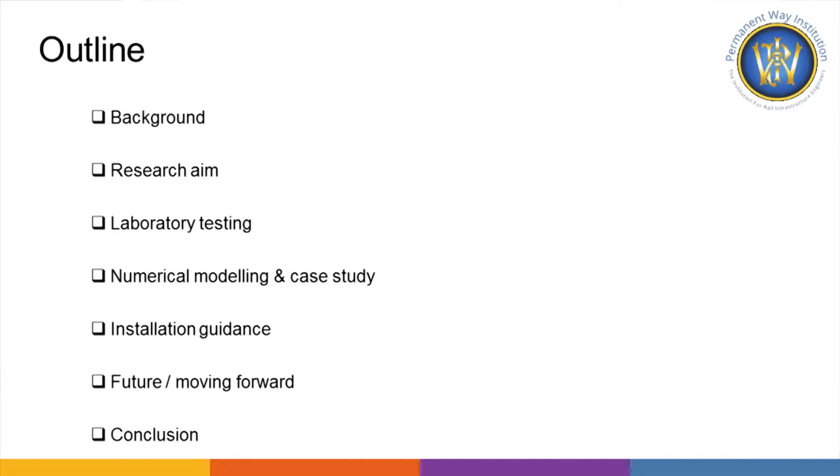Now, the outline of the presentation will go as following. We'll go through very briefly the background, the old stuff, the boring stuff. Then we'll talk about the aim of this research, and discuss and show some results obtained from laboratory testing and numerical modeling. That's basically all me, that's the boring, theoretical stuff. Then Mr. Noggi is going to come and steal the show with his impressive stuff about installation. So it's a mixture between theory and installation guidance.

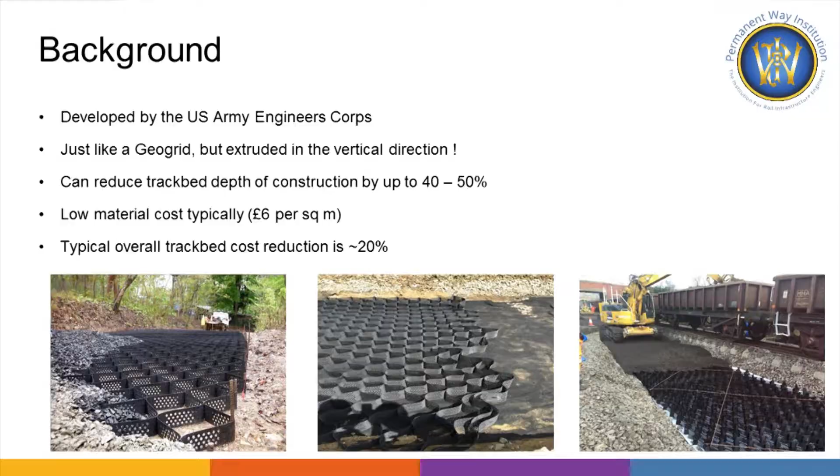Now, what is geocell? Geocells are basically honeycomb panels. They look like a geogrid, but they're extruded in the vertical direction. It's not a geogrid, but it looks similar. You fill materials inside, and it creates a reinforcing effect on the subgrade. It's been developed by the US Army to build roads for jet fighters and tanks, so it's quite robust, and it can reduce the depth of construction by almost 40 to 50%, and it's very cheap. It costs about £6 per meter square, and if applied properly, it can lead to reducing the cost of trackbed installation by about 20%. But that's basically applying it carefully.

Now, how does the geocell work? The geocell works in three mechanisms. It creates a vertical confinement due to the friction of the geocell, the internal friction of the geocell wall. It also creates a lateral confinement by developing something called hoop stresses - you apply the vertical pressures, and then you get hoop stresses that confine the material, not allowing it to move or deform laterally. And if you've got excessive loads, you can end up with a tension membrane effect, getting some tensile strength out of that. So this is how it generally works.

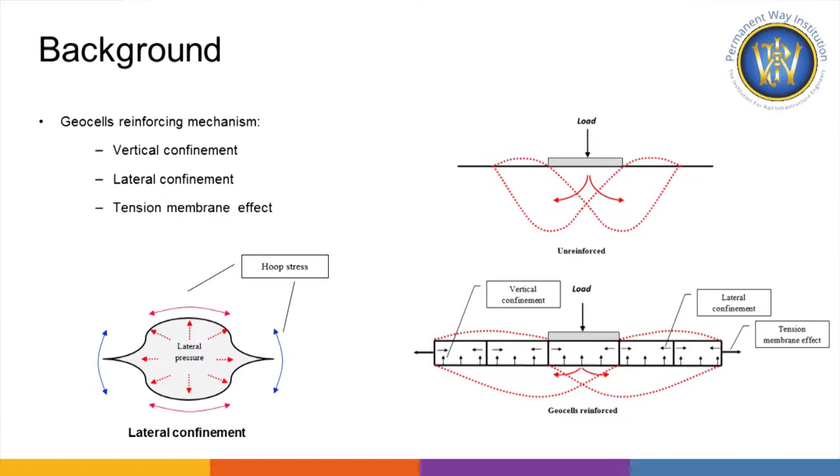Now, it all sounds good. There's tons of research that proves it works, but there's a problem: designers and contractors are reluctant to use it. Designers are reluctant to design for it because there's no universal way of designing trackbed with geocells. That's a struggle - I'm a designer myself, and it's not an easy task. There are many ways, but no universally agreed way. There's also limited experience with installing geocells. We have seen sites since probably the early 90s, maybe 80s, that had geocells, but it's still limited - it's mostly done for bespoke sites.

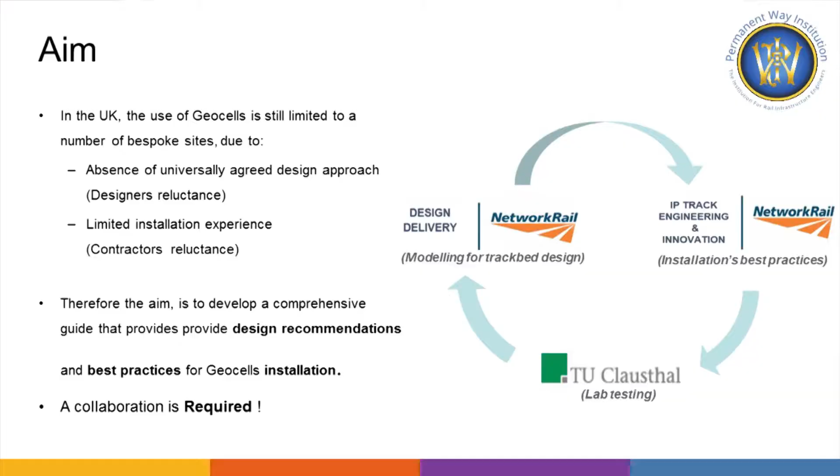So what's the aim of this research we started? The aim was to come up with a comprehensive guide that provides designers with design guidance and best practices for contractors to carry out the installation in the most efficient way. But how can we do that? Well, in the TBI we're mostly a design team, so we had to have some sort of collaboration. We worked with IP Engineering and Innovation and TU Clausthal University in Germany, which is a leading university in geocell research, on trying to understand how we can design and install geocells in the best way possible.

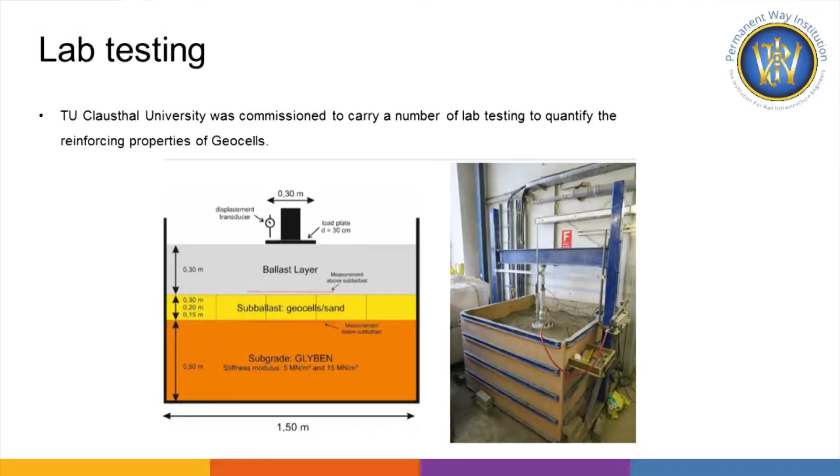To go through the lab testing, TU Clausthal University proposed a test configuration where we relied on applying a plate load test for a trackbed with different geocell thicknesses, reinforced and unreinforced, instrumented with a number of pressure sensors, settlement sensors, and so on. We've been doing the tests for a number of different soil stiffnesses. The tests are currently ongoing - so we're still getting the results. There's so much data coming through now, and we're still in the process of analyzing it.

But I'm just going to go briefly through some of the most interesting stuff we've managed to understand so far. As I said, they've instrumented the rig with different pressure sensors. So what we've done, for example, is apply a plate load test on different tracks with different sub-ballast or fill material thicknesses, reinforced and unreinforced - we've got 150, 200 mil, and 300 mil. And this is the amount of stress being felt by the subgrade.

So you can see how much stress is being exerted. This is the most important thing for us, because if you know the stress, you can know how much the subgrade is going to settle, and what sort of failures you may experience, as Matt explained in his previous presentation. So it's very important to understand that.

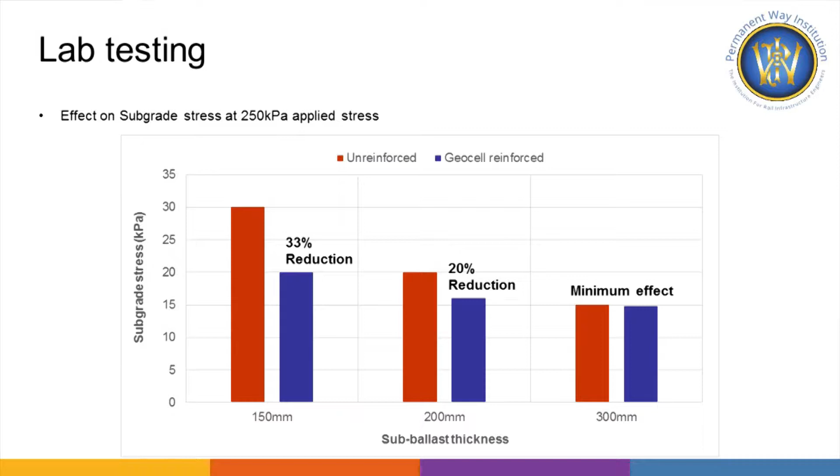From the geocells, for example, for the reinforced or unreinforced case for the 150, we're getting about 30 kilopascal if we apply 250 kPa on the surface. If you put a geocell, you reduce that by 33%. But if you go for a 200 mil geocell, you reduce that by 20%, and if you go for 300 mil, the impact is very minimum. That's confusing - people think if I have a thicker geocell, it should work better. Well, yes, true, but geocells only work if you get lots of stress being applied. Because so much stress is dissipated by the time it reaches the subgrade, the impact is very small. If we had higher stresses being applied, it would basically get the geocell to kick in for these particular cases.

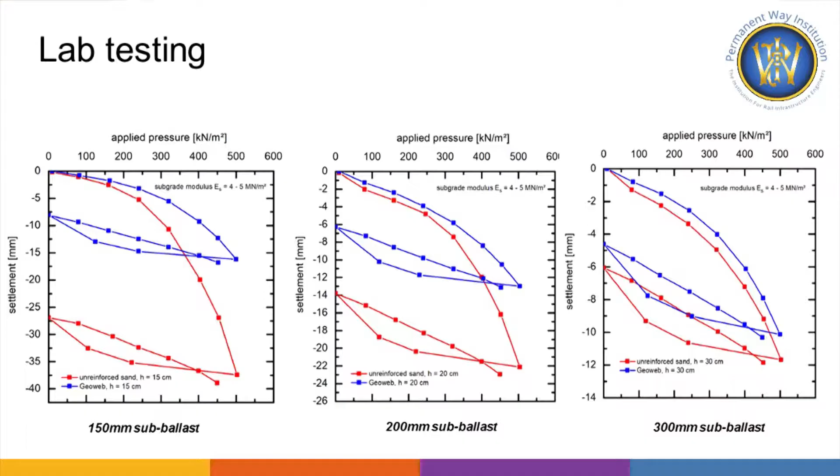So this is all nice - what can we do about it? We're trying to extract as much information as engineering parameters from these tests, because there are different ways of interpolating these results. We took the information from some of these tests and plugged it into our finite element model. It's not as fancy as what David showed you earlier this morning with his modeling stuff, but it should do the trick for us.

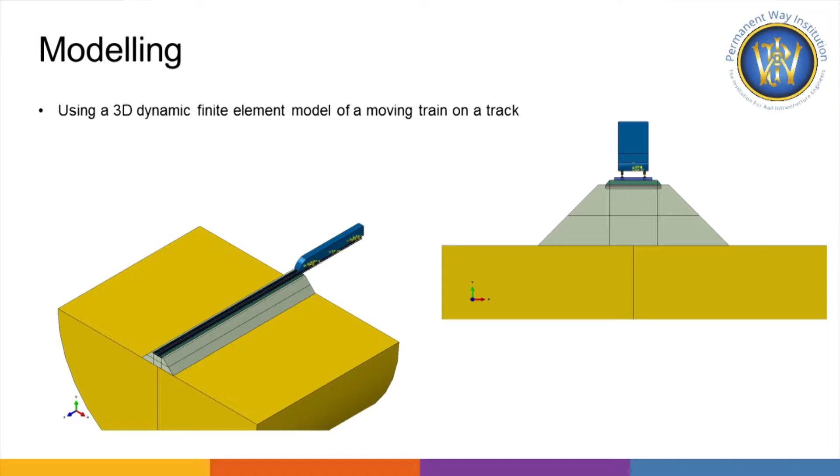So we've used a 3-dimensional finite element dynamic model - it's a moving train. We've got a Virgin Pendolino train moving on this embankment, with a total depth of almost 50 meters. It's quite thick in terms of the analysis, and it's running at approximately 100 miles an hour.

We looked at 3 design scenarios. We're looking at standard design right from our design standards - if we've got this kind of soil, we're going to have this sort of design. And we're looking at 2 alternative geocells with reduced thicknesses. The soil we wanted to look at here is about 20 MPa, somewhere between firm and soft clay. We're looking at a line speed of 100 miles an hour and quite high traffic, 30 EMGTP, and we've carried the analysis for 10 years.

The purpose of this analysis is to put the parameters from the test into the model, try different designs, and look at the total track settlement, because that will basically drive your maintenance, tamping, and interventions. Obviously, for the purpose of this exercise, we assumed no tamping or maintenance is taking place for 10 years, so we just want to look at the raw total track settlement and see what we get out of it.

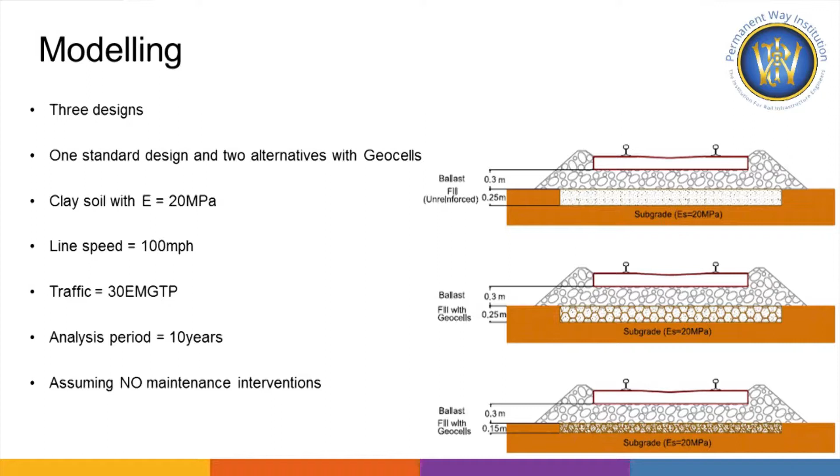For those 3 cases, we looked at the standard design by Network Rail standards, which is 300 mil ballast with 250 mil fill material. We proposed an alternative with the same thickness but with the reinforced case, and with a reduced depth of 150 mil fill. So we considered 3 cases, and wanted to look at the total amount of settlement across the subgrade for the model. The model has a length of 59 meters, and it has something a bit unique you wouldn't find in a lot of models - it has inherent track geometry, so we wanted to generate dynamic loading.

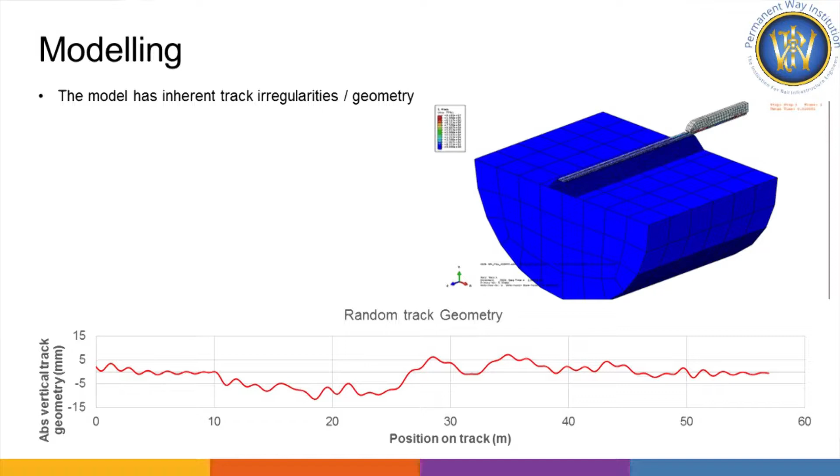If you run this model with a smooth surface, probably rail surface, you're not going to get any significant fluctuations in dynamic modeling. So what we've done is basically create some sort of inherent geometry on the surface of the rail to generate these dynamic loads, to be as realistic as we can with the modeling.

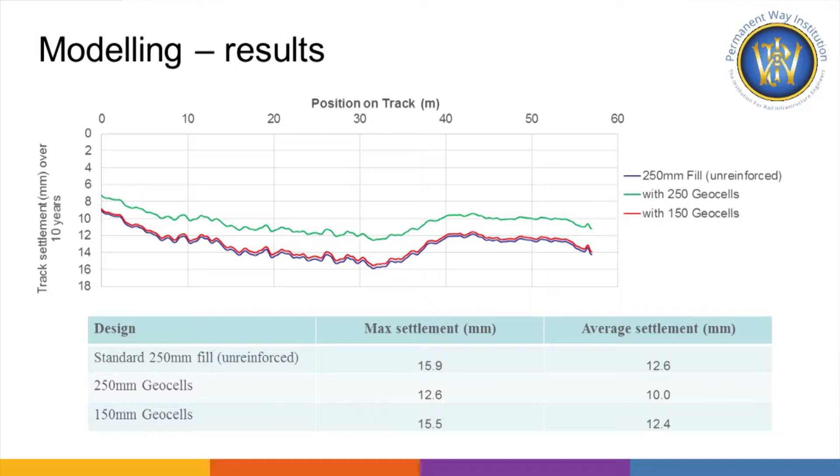You can see that the one with the geocell seems to be settling at a rate about 20% less than the unreinforced case from the settlement point of view. But if you reduce the geocell thickness to 150, you end up with a very close answer to the unreinforced case with 250 mil thickness. So that tells me if I replace my standard design with a reduced design by 40%, I'll probably end up with the same performance for that case. Things can be different for different ground conditions, stiffnesses and so on, so that cannot be applied everywhere, but for the sake of this exercise, this seems to be the case.

Now, to validate this, or to see if this is what we're getting in practice - a year or two ago, we worked with David Woods on the Northern program, where we installed, or designed, geocells with reduced thicknesses. For that particular track, the standard design had 230 granular fill and then 50 mil of sand. What we did with the geocell, we reduced the 230 to 150 mil with the geocells, and then we installed it.

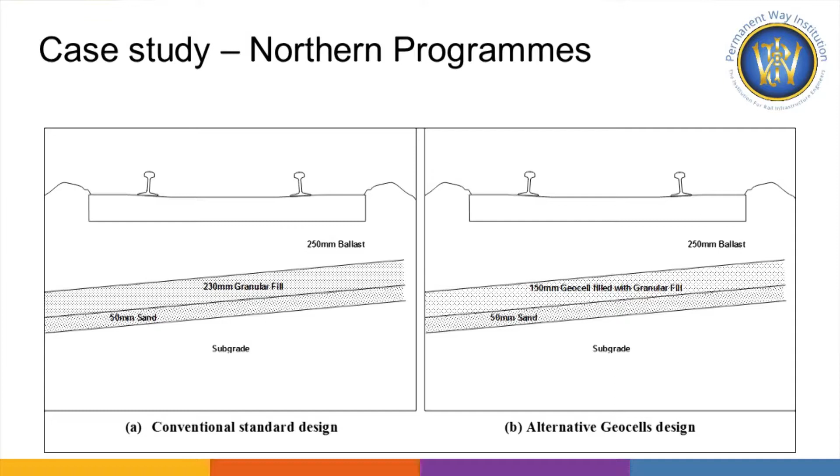You can see there's a significant change in the rate of deterioration in track quality just by installing the geocell, even though it has a reduced required thickness, but it seems to be performing in a very stable manner. If you look at the rate of degradation of track geometry, at the top 35, it used to be degrading at 0.15 mil a year. Now it's almost not deteriorating at all.

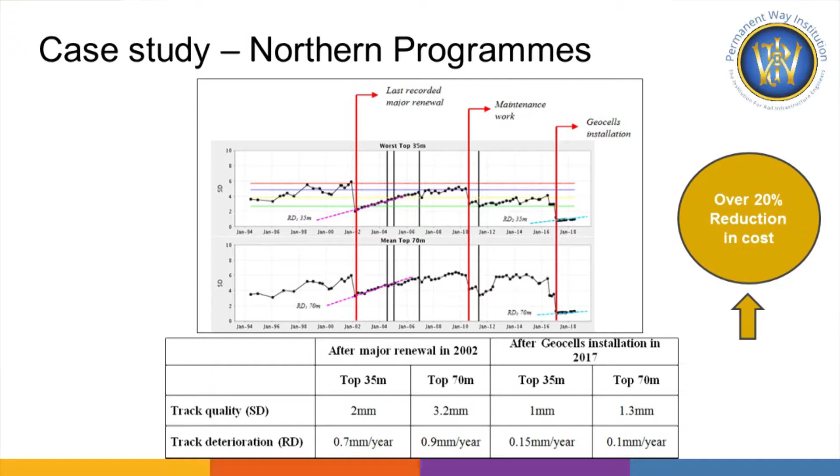Sorry, it was deteriorating at 0.7 and then reduced to 0.15 mil a year. On the top, we're seeing something similar - it used to be deteriorating at 0.9 and now it's deteriorating at 0.1 mil a year. So there's a massive improvement in terms of performance after the installation of geocells.

Now, what's the beauty of this? Well, it was 20% cheaper than going for the full dig. So we managed to reduce the dig depth and have very good performance. I think the estimated saving was about £300 per linear meter of track installation. So it seems to be quite impressive.

Now, I'm going to hand over to my colleague, Levente, who's going to go through all the practical aspects of installing geocells properly. Thank you.

And the middle is the pointer. Yes, okay. If there's something that's not up for debate from Mohammed's presentation, it's the fact that I'm Levente Nagy and I'm a senior design engineer at Network Rail.

We started installing geocells on isolated sites since the 80s, but because that was just a small number of sites throughout a few decades, the installation contractors didn't get to learn too much from their mistakes because they never had the chance to repeat such an installation. But nowadays, because we understand better the benefits of geocells, we are installing and specifying more of these products at our sites. And obviously, like any novel product or new installation process, that comes with inherent mistakes that we're trying to learn from. So we are continuously gathering feedback from our installation contractors, and we're working on putting together guidance that will be useful for the whole rail industry in the future.

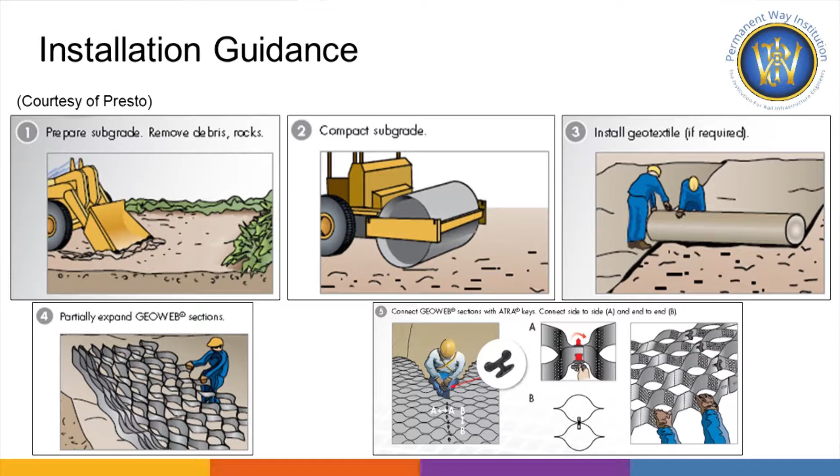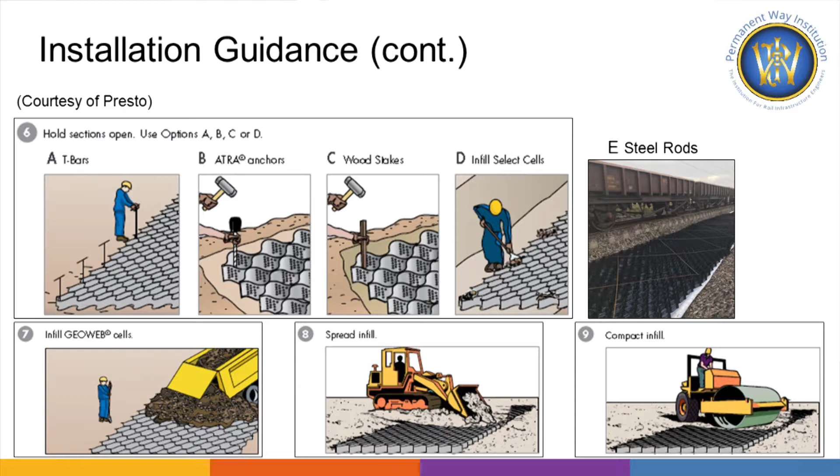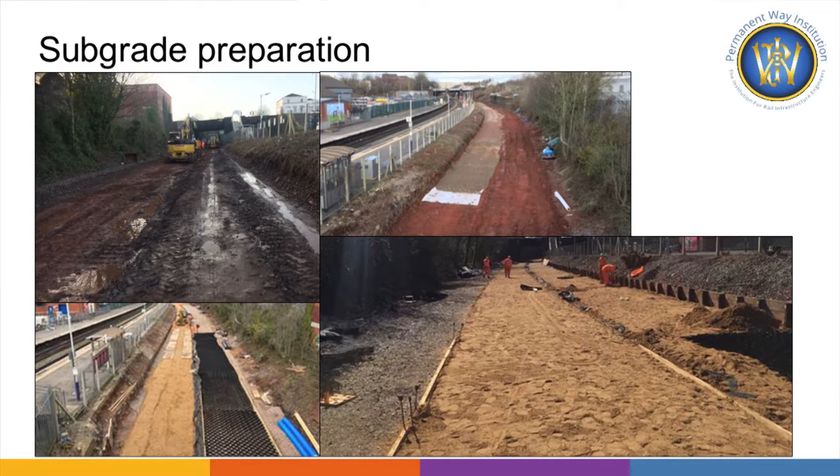About expanding the geocell panels, there are various conventional methods that have been used and are still recommended by the geocell manufacturers. But our colleagues in the contractors' teams and from IP Track raised safety concerns related to the continuous hammering of stakes or bars. You can imagine we're supposed to install tens and hundreds of those on a single site, so that may be a valid concern, and eventually they proposed this kind of arrangement.

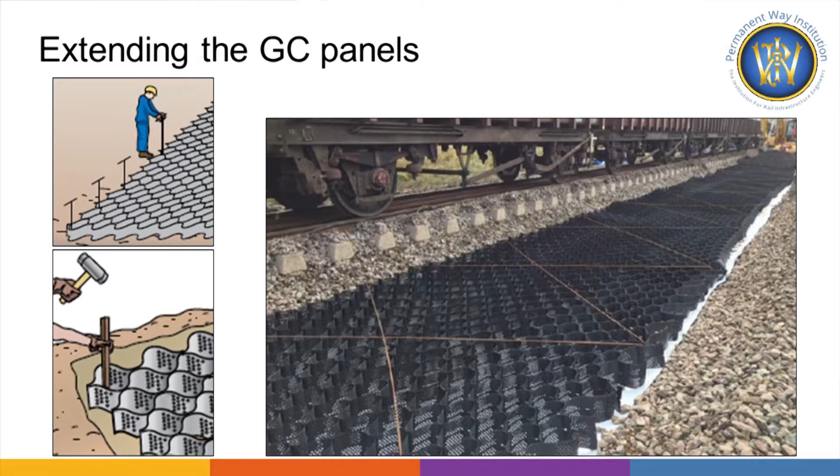The next step is connecting the abutting panels of geocells. This is very important - otherwise, if we're not connecting them, we're not achieving continuous stiffness of the layer, and there's a risk of differential settlements. To aid installation, it's very helpful to connect as many panels as possible beforehand on the side of the track.

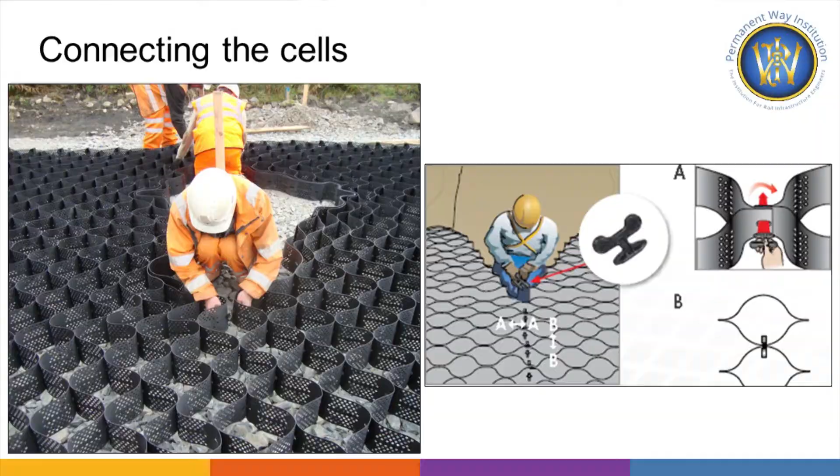Bear in mind, the panels come from the manufacturer in 5-meter lengths, so we try to connect up to 40 or 50 meters, and they're easily expanded on site. Even these 40-50 meter sections need to be connected between them.

Also, something I should mention: once connected, before bringing in the granular infill, these geocells are an obstruction for walking and for movement of plant. So we need to make sure that on the site we have a clean and safe walking route for our personnel.

Unloading the granular fill conventionally has been done with dumper trucks. It can also be done with excavators taking the infill material directly from the adjacent track, from the wagons.

Or, something our very clever colleagues from IP Track used, an MFS machine, so that conveyor belt can very easily and very quickly unload the sand.

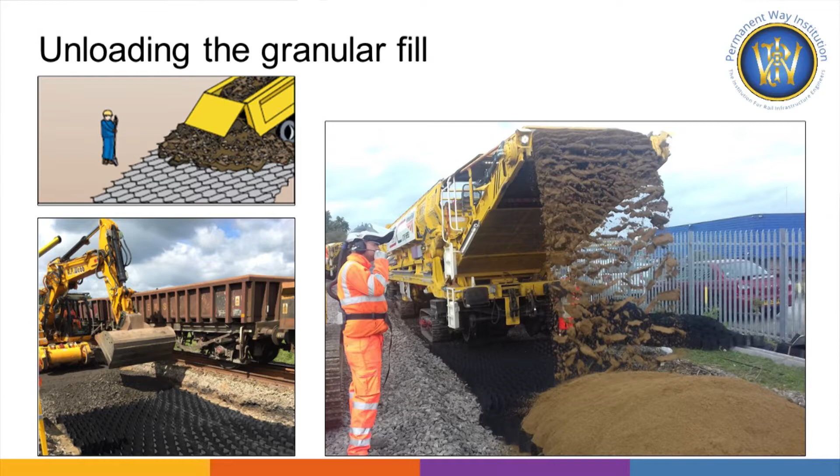Now, on single line working there could be a bit of a problem because you only have limited room for expanding the geocells. That means you have to spend a lot of time connecting short sections of geocell panels. That can be overcome by preparing a longer section and keeping it squeezed, unstretched in the area, gradually stretching it as the machine advances.

I think there's something missing - I had a nice video after that one. Is it after that one? Okay.

It's very important to plan the works so the best possible productivity is achieved. Depending on the number of lines available, we have three cases. One of them is single line working - just one line, and we have to work on that line with a machine.

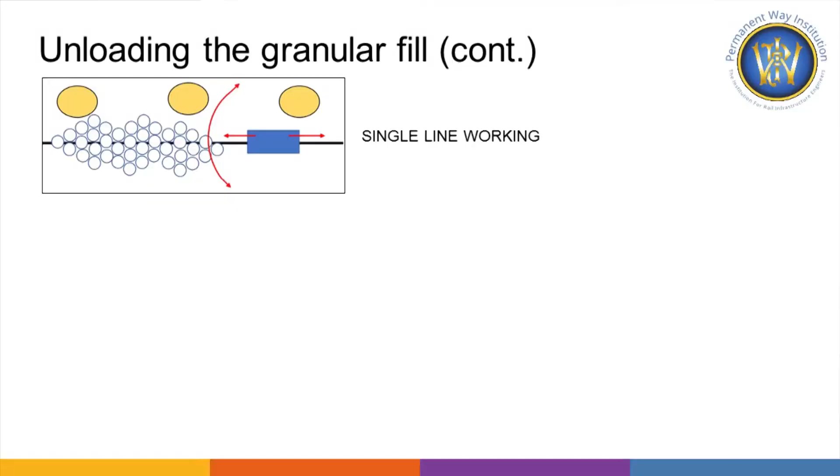That means our excavator has to take materials from a large distance, and there's a lot of transit movement which takes a lot of time. That can be helped by placing some infill material on the side of the track to speed up the process. I think the best productivity achieved with single line working was up to 40 yards.

The second case is when we have two lines available - we can place a train with wagons on one, and on the other, where we install the geocells, we could have one excavator taking material from the wagons, unloading and spreading/leveling it at the same time, or work with two machines, almost doubling productivity. We went up to around 70 yards productivity per hour with this case.

That's something even better - when we have more than two lines. We place the wagons on the far end, with one or two machines unloading the material, and one or two more machines leveling the infill on the geocells.

Oh, that's the one. So I'll let you watch this one first.

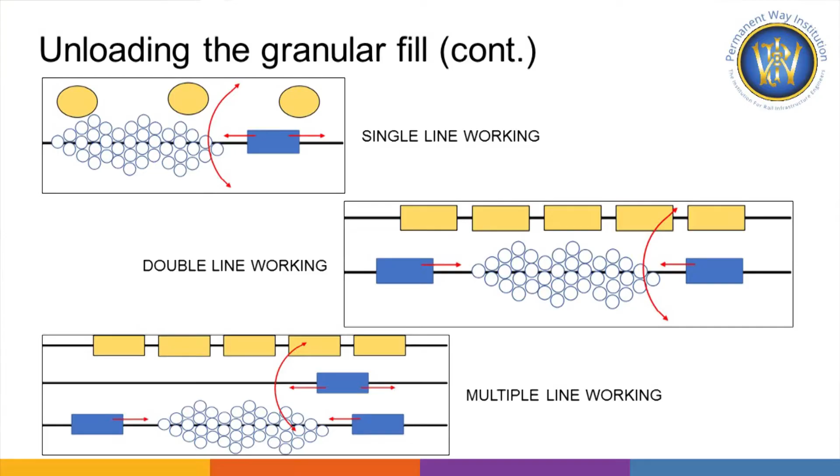Technically, that's the same MFS machine that I showed on the single line working, but on a double line. This is arguably the most efficient method that has ever been invented, and I think IP Track did that first. So we work very closely with our counterparts in the United States.

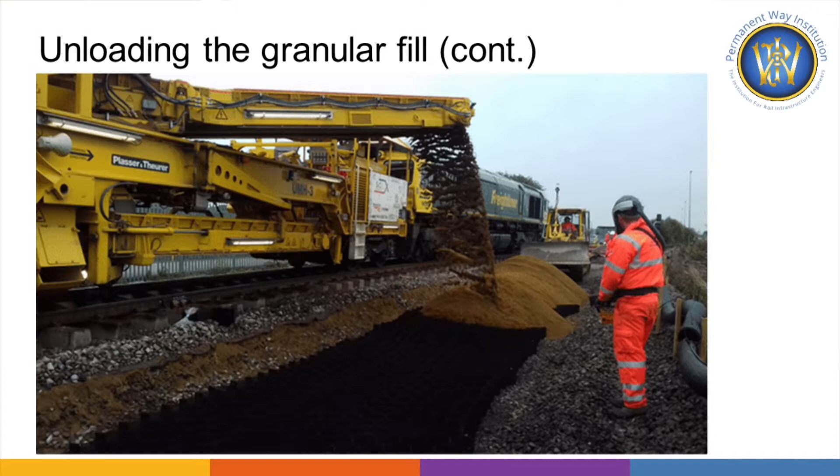They have decades of experience in installing and designing geocells. Mohammed sent them this video, and in half an hour, their director placed it on his LinkedIn account. So even they were impressed by that. You can imagine with that speed, you can install hundreds of meters in an hour.

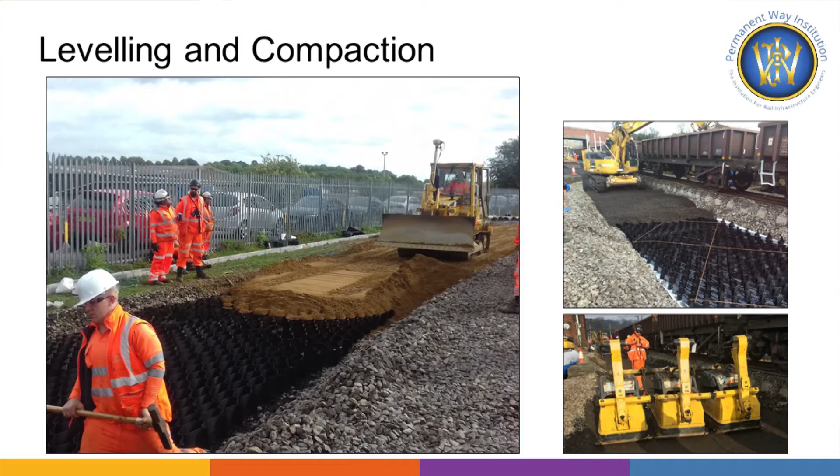Probably the biggest challenge is connecting the geocell panels. Leveling and compaction. Leveling can be done either with dozers or with the excavator that does the unloading at the same time. For compaction, we recommend some lighter machines like vibrating plates, because a larger roller compactor could be very heavy, and taking into account that we install geocells on very soft conditions, it could create a wave shape on the subgrade.

So plates are ideal for compacting the granular infill on the geocell, and that was also confirmed by our colleagues in Germany.

Okay, now obviously this is where things could go wrong. We recommend up to 50 millimeters of overfill on top of the geocell before compaction. So technically after compacting, we are coming fairly close to the top of the geocell.

Now, obviously, on some sites, we achieved this. That is not because there was a very efficient compaction, it was because there was not enough fill on top of the geocell wall. And that is mainly because the level of the dig and the geocell on top of the dig is not very smooth.

So parts of the geocells are sticking out. So when you install your infill, some of them could still stick out, and they can be damaged by the dozer when they do the leveling, or even being collapsed under the compaction tools.

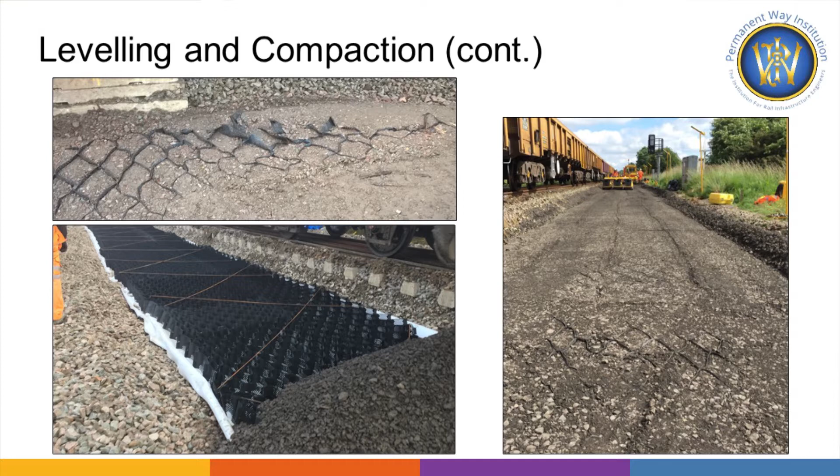One of the challenges that we have is the interface between two shifts. So technically after the first shift, we have to open the line for traffic and come back next day or next week, depending when the second shift is. And when our dozers start digging out the substrate for the next panel, there is a big risk of damaging the end of the geocell.

We brainstormed this one to death, and we came up with some solutions. Bear in mind, this is just a prototype, so it hasn't been applied on track, but we'll do it at the first opportunity. So this is what we are proposing: to install the first geocell in the first shift, and the last meter from the end of the geocell panel to be kept unextended.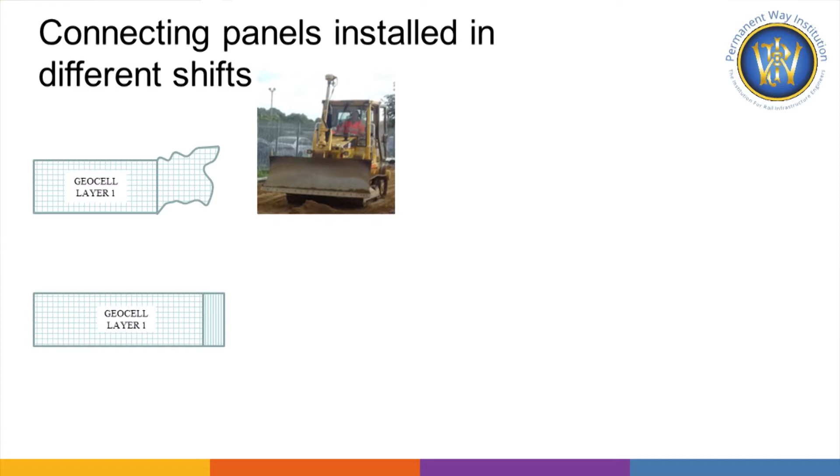So this is technically 1 meter of geocell being squashed. Still in the same shift, we are proposing a short section of sand to be installed, approximately 1 or 2 meters. A little bit of ramp would help, not absolutely necessary.

So next time, when we come back in the second shift, this sand can easily be dug out by the bulldozer. This end of the geocell can be marked up on the side of the track so we know exactly where it is. We can stop very close to that one, few centimeters or tens of centimeters with the bulldozer. The rest can be easily removed with shovels. It may take a few more minutes, but that's it.

And we can expand that 1 meter of geocell. The reason for this is if we left this one completely expanded, because the last set of cells would have been filled in with sand, you couldn't have connected it easily with the ATRA keys with the next new panel. So now we extend this 1 meter, it's completely empty, and when we install the next panel, it can be very easily connected manually. And the whole process can be repeated in the following shift.

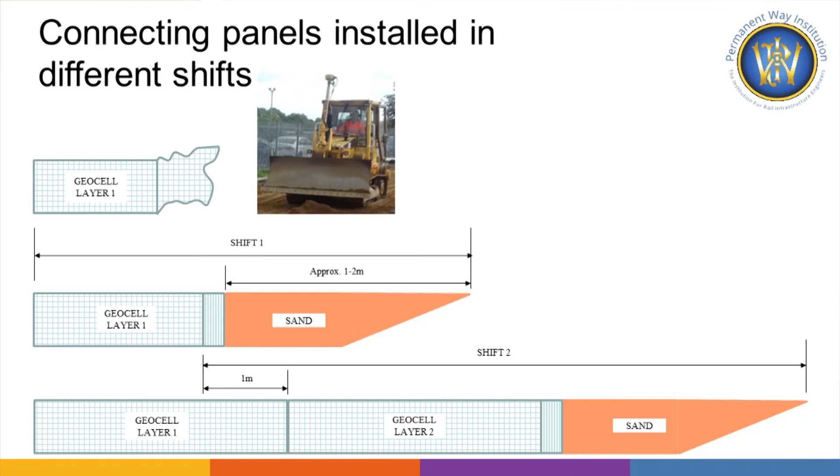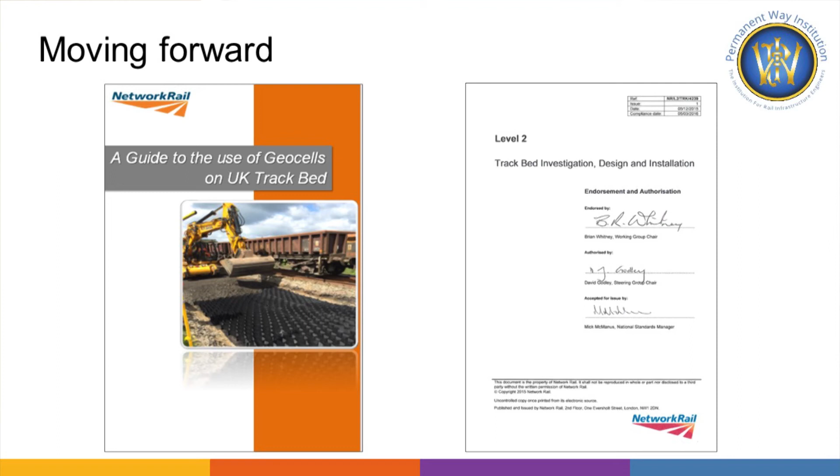So the bottom line of my presentation is, as Sinsin said, gather a lot of data, draw a conclusion, find out what is the root cause, do a good design, as Mohammed said, but all of that can be thrown out of the window if we don't install that product correctly. So we are still learning lots of lessons. We'll put them in the guidance, and that will be available for the whole rail industry. Thank you very much.

Thank you very much.

That's the conclusion slide. So moving forward, we're going through with basically creating a guide document, which we're hoping will be available online on the PWI website, and it will be subjected to internal and external review. And also we are going through the process of updating the standards with the support from SDE.

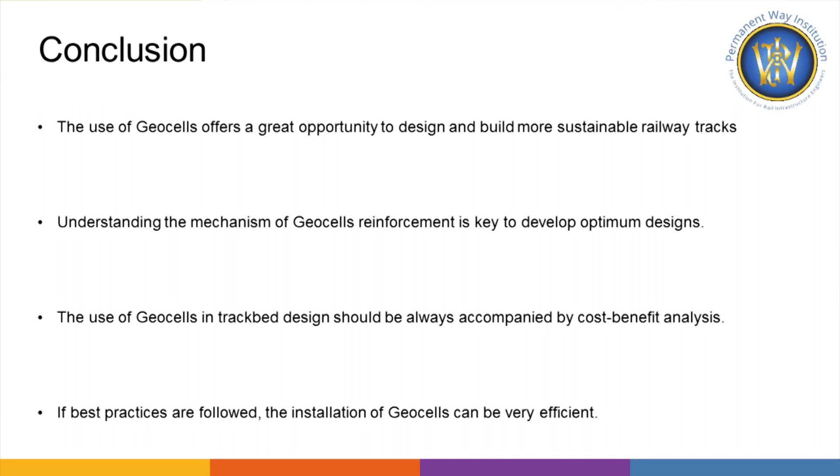And in conclusion, geocells offer a great opportunity for building more sustainable railways, and following best practices is key to efficient installation, as Leventi said. And thank you all.